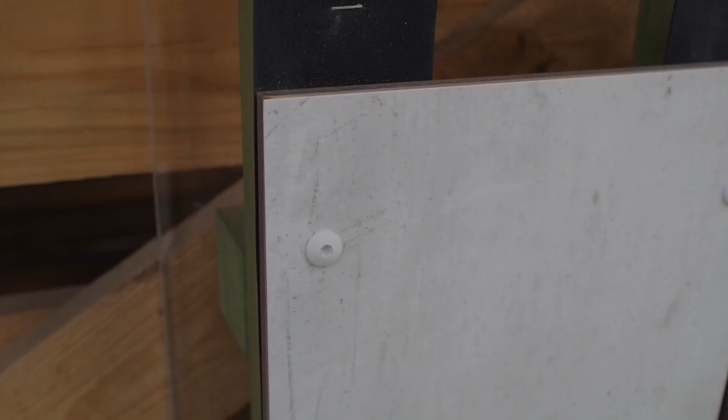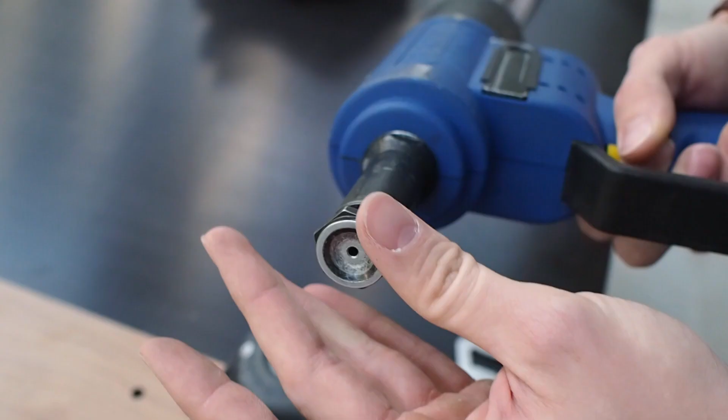Explaining some basic details: the words sliding point, fixing point, and the gaps. So we are talking about a rear ventilated facade. We have the brackets of the aluminium consoles.

When we're talking about the rear ventilation, we have a minimum distance from the wall, 20 millimeters, okay? Minimum. So it's always good to calculate with 30 or 40, okay? Because your wall will maybe not be completely straight. Maybe it's a little bit wavy or so. So calculate with 30 or 40 millimeters.

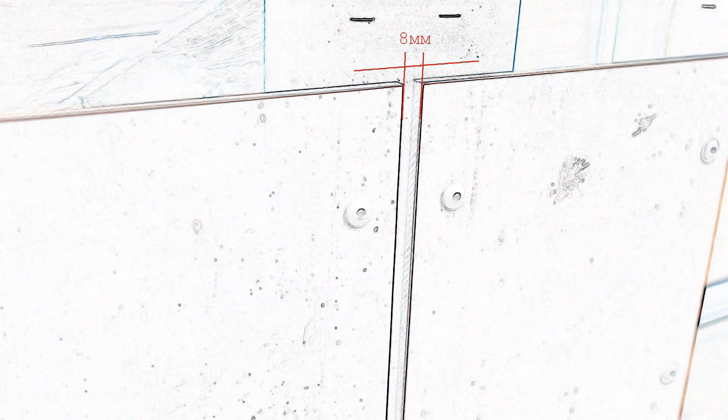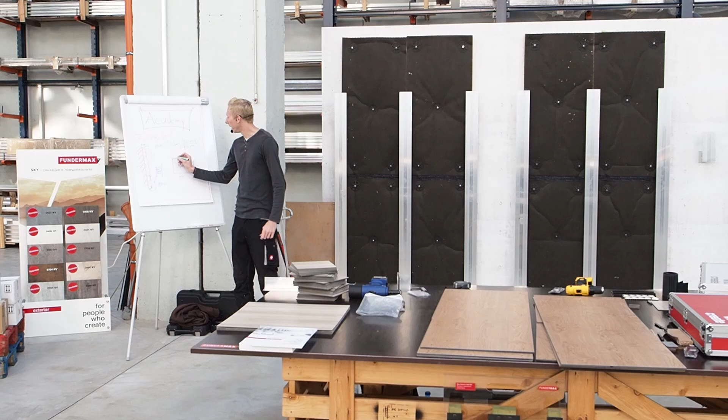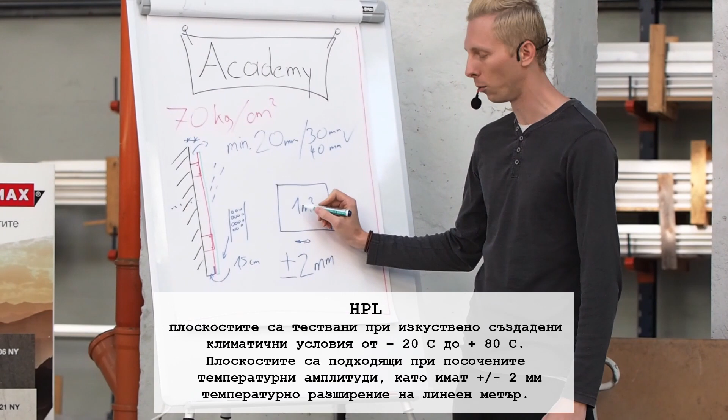And then the movement. So we know inside of the panel is the paper, and it will expand and shrink a little bit. An expansion per meter of about plus minus 2 millimeters, okay? If you have 1 meter distance. So this is sounding like a lot, okay?

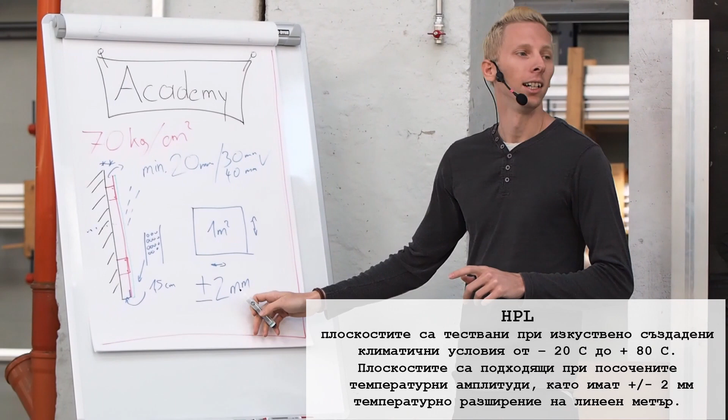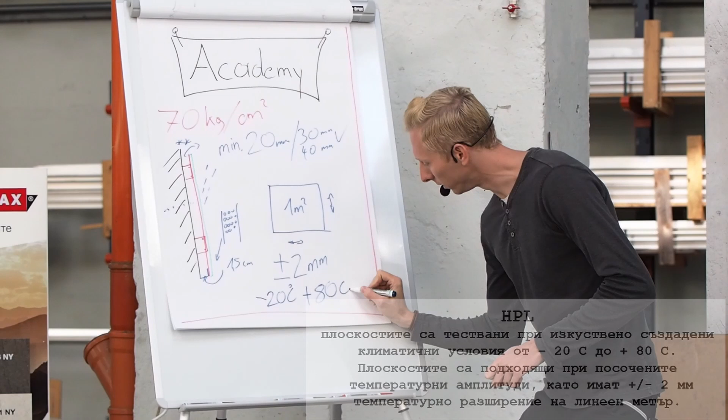But don't worry, this is tested in an artificial weathering test from minus 20 degrees to plus 80 degrees, okay? When you start at minus 20 degrees and you go up to 80 degrees, also in combination with humidity, then it could be that it will grow 2 millimeters.

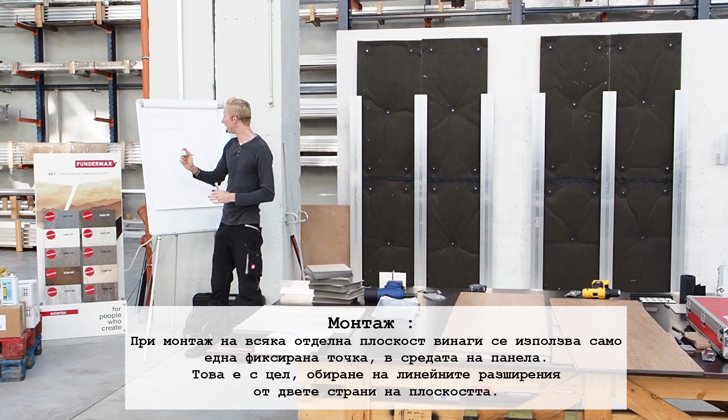So the biggest size of our panels is 4,100 millimeters exactly. It's the longest panel. Let us say now, for an easier calculation, 4 meters. Fixed point always near the middle of the panel to share all the expansions. Okay?

So we have the fixed point here in the middle and here in the middle, and in this direction you have 2 meters to expand, and in this direction also 2 meters. Okay? And if we know that 1 meter can expand theoretically 2 millimeters plus minus, you just have to calculate it.

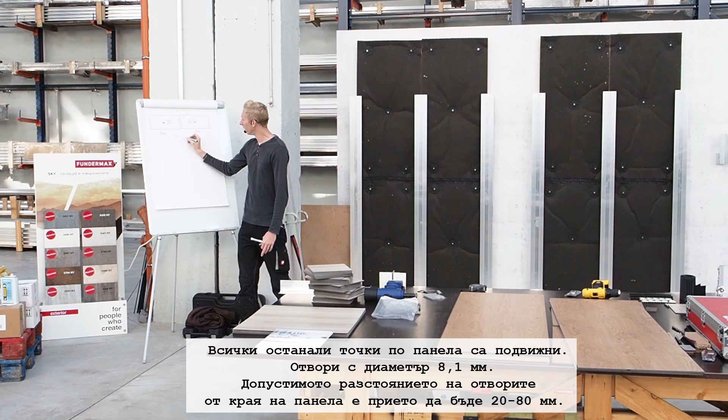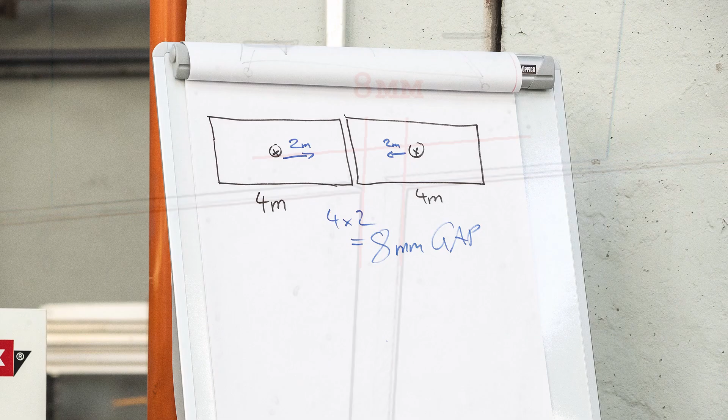2 plus 2 is 4, then multiply it with this 2 millimeters expansion, then you will get the 8 millimeters. Theoretically, if you take our biggest panel and you make the fixing point according to our recommendations, you will never get a problem if you make an 8 millimeter gap.

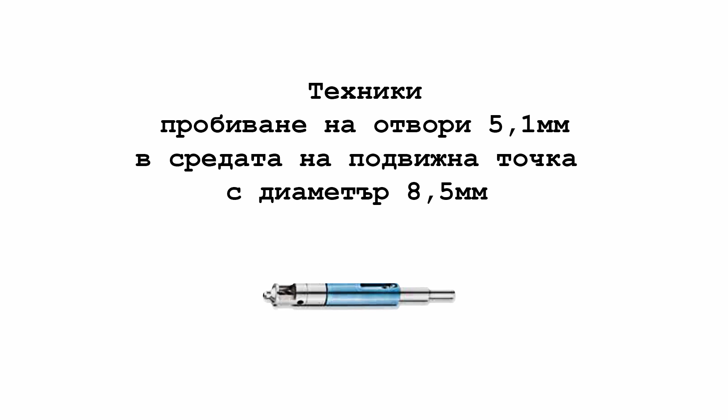How will you find exactly the middle? So we have 2 options, okay? I have here a special spacer like this. You have a mouthpiece here with a diameter of 8 or 8.5, and in the middle is a hole with 5 millimeters. You put this in the hole of your panel in this way, okay? And then you come with your 5 millimeter drill and set it here. So this is the cheap solution, but it works perfectly, okay?

And now the tool for the professionals. This is a combination drill. You put this tool in your machine, 8 or 8.5 millimeter, and then in the middle comes the 5.1 drill, okay? So you need only one hand and your machine. You take the panel and drill the hole, and it's quite easy to center.